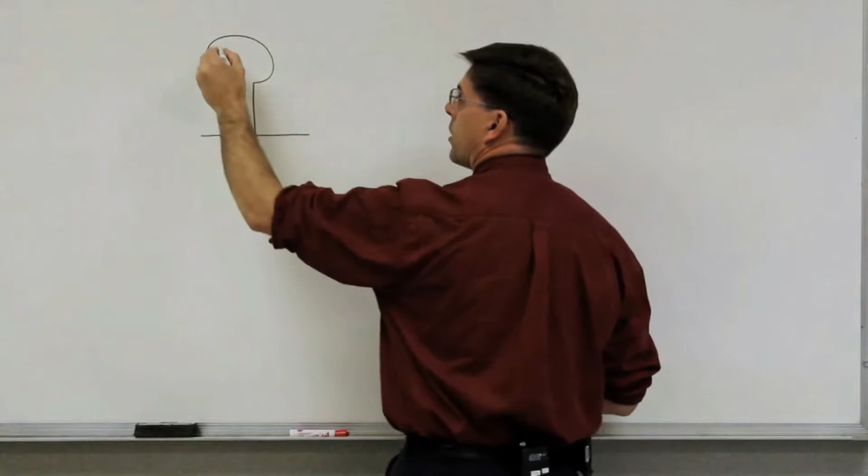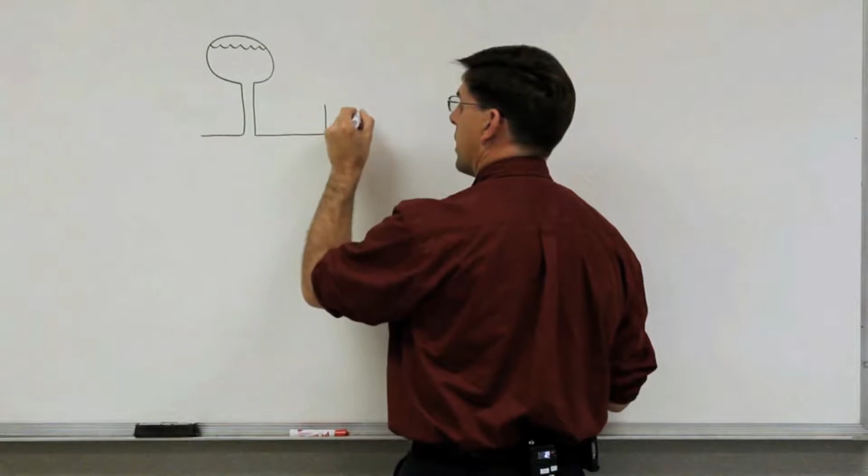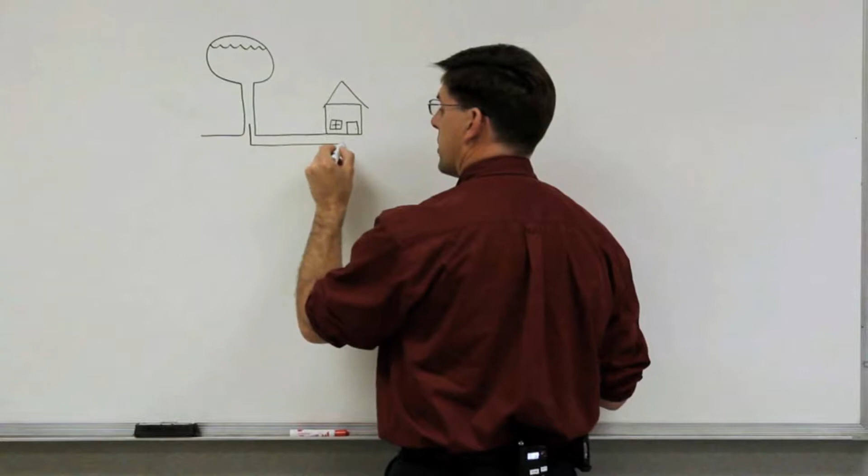First, we're going to try to equate the theory of the charging system to an actual water distribution system in a small town or village. Right here we've got a water tower, and our water tower is full of water. The job of the water tower is to store water for use on demand. Now we also need to be able to use that water, so I'm going to build a little house right here, with a cute little window and a little door. I'm going to put a standpipe in my water tower up to my house.

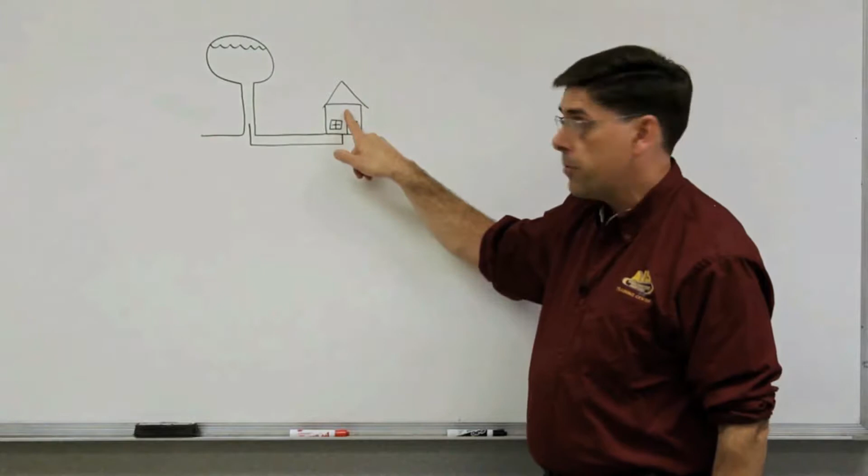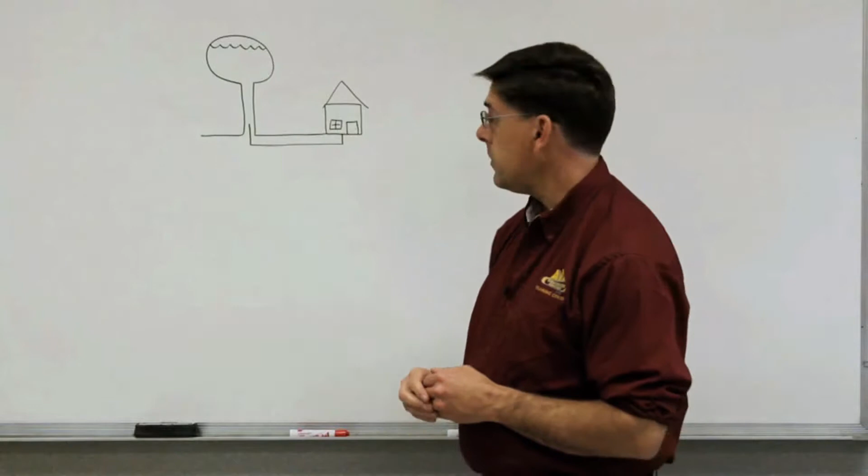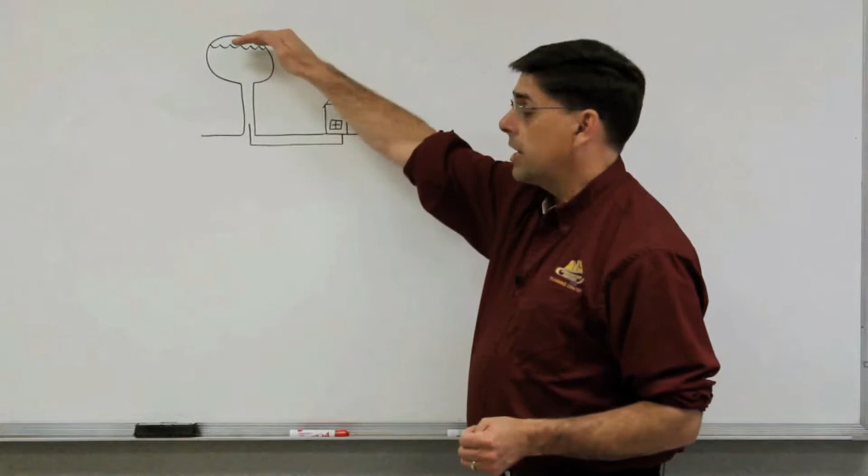Here's my storage, here's my water being stored, and here's my load, or my demand, if you will. So the water tower is supplying water to my house, or my network of stores and schools and factories. This all works fine and dandy, because when we turn on our water system, we turn on the sprinkler, the dishwasher, flush a toilet, take a shower - what's going to happen to our water tower level is it's going to go down.

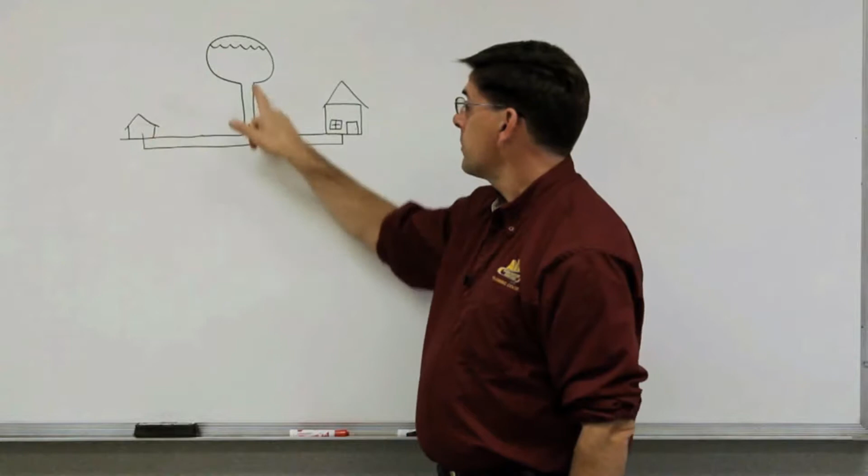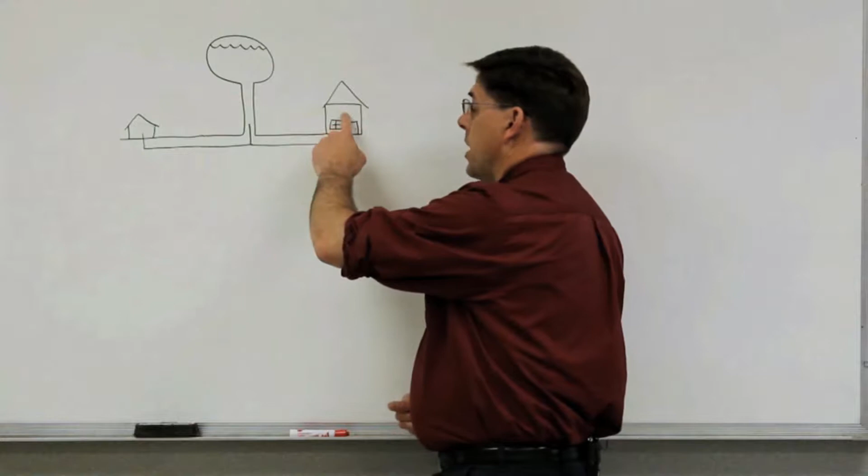That all works fine and dandy until the water tower is empty, and we need to pump it back up. So here we have a pump house keeping our water tower full. Here's our water tower, which is our storage, and here's our demand, where the water is going to. As the water gets used in the town, the water level goes down. The pump house turns on and keeps the water tower full. Remember, this is like an old water tower system here.

Now let's talk a little bit about sizing the components with each other, or the system together - it all has to work together as a system. So I have a pump house here. The pump house really has to be sized to the water tank and the system. The water tower has to be sized to the community. You can just imagine if I had a real big community and a little tiny water tower, I wouldn't have enough reserve for when my pump is not running.

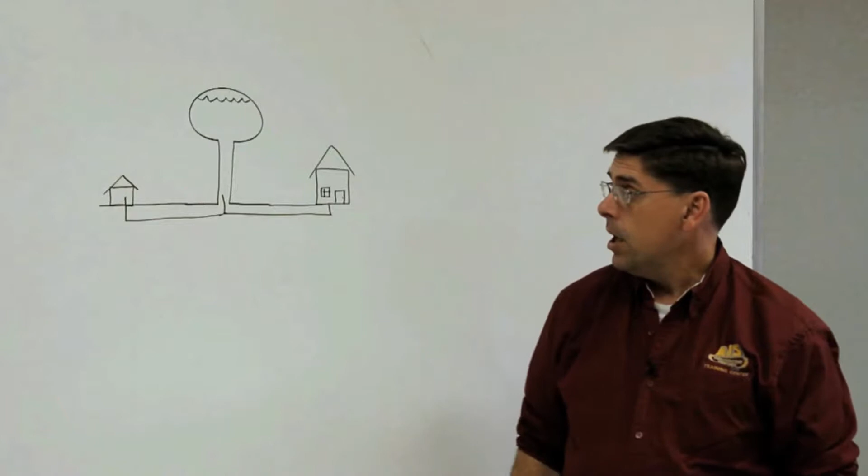I realize in a pump community they're running basically all the time, but in our case, when we equate to the charging system, it is not always running. If we have too small of a water tower, it can't supply the community, and it may overwork the pump house. There's no use putting too big of a water tower in, because you don't have that much real estate and it costs more money. So it really has to be sized according to what the loads are, what the demand is.

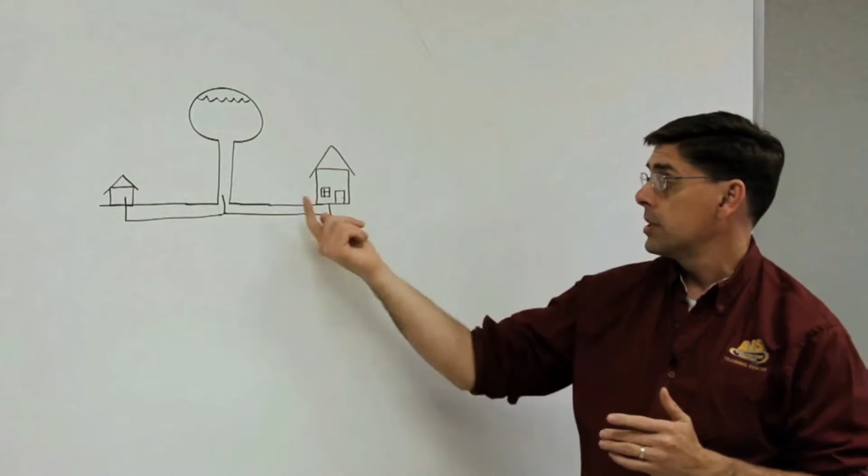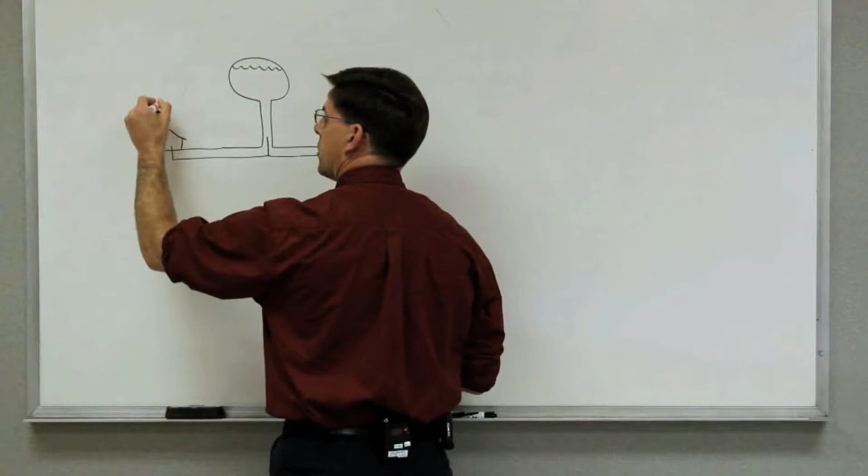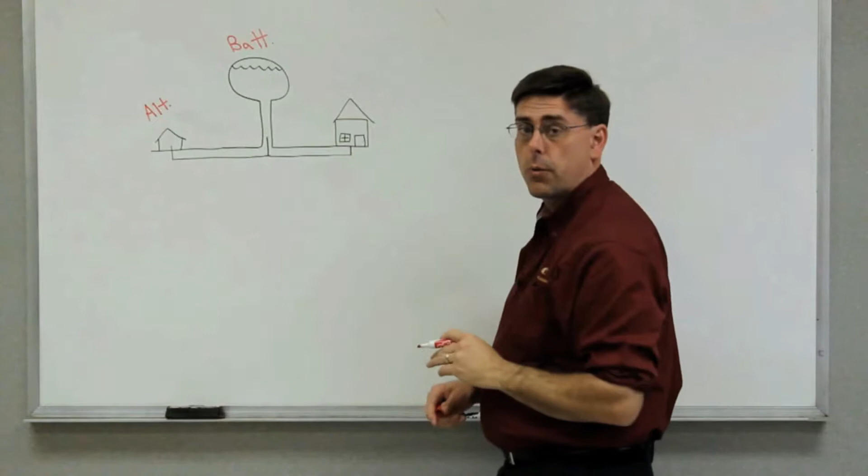Okay, now let's name our electrical components. We know that's not a pump house, because there's no pump house in our electrical system - that is our alternator. This water tower, our storage system, is our battery. We do know from a previous video that a battery does more than just store, it does produce it too, but for our charging system we're not worried about that. We're going to look at this today as just a storage facility.

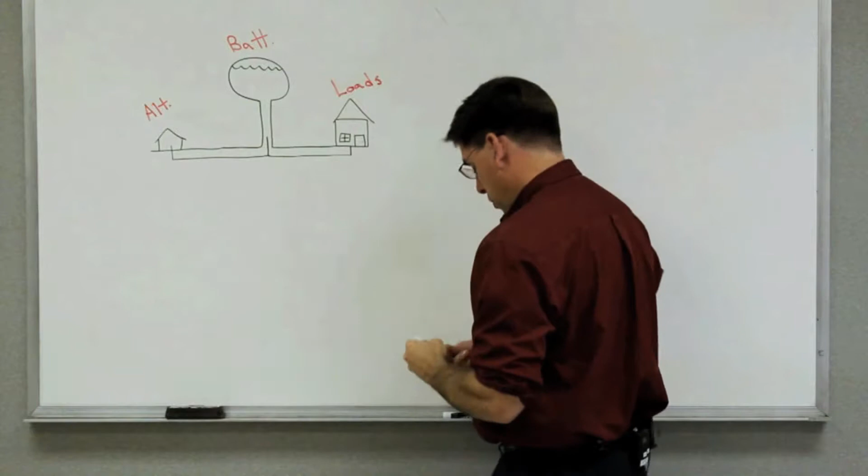And then we cannot talk about this as our water system or our electrical system, because the whole thing is part of the system - this is just one part of the system. So we're going to talk about this as the loads, being there's more than one load. The shower is one load, and we're not worried about just one shower - we're worried about the toilet, the dishwasher, the water faucets, everything combined as part of our loads on our electrical system.

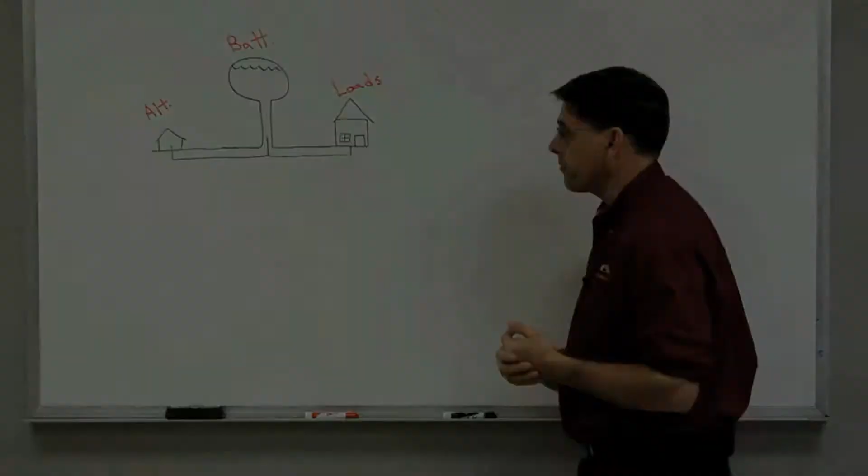Okay, now let's talk about sizing the components a little bit. Now, it's not like you're going to just take a piece of equipment and design it and decide what size alternator or what size battery to put on it. But it's when you start adding components to it, or you start having failures, like you're going through alternators, that you need to understand what's really going on with it, and why it has a certain battery, and why it has a certain alternator.

So, for the heck of it, for the sake of argument, I'm going to call this a 90 amp alternator - that is rated at 90 amps.

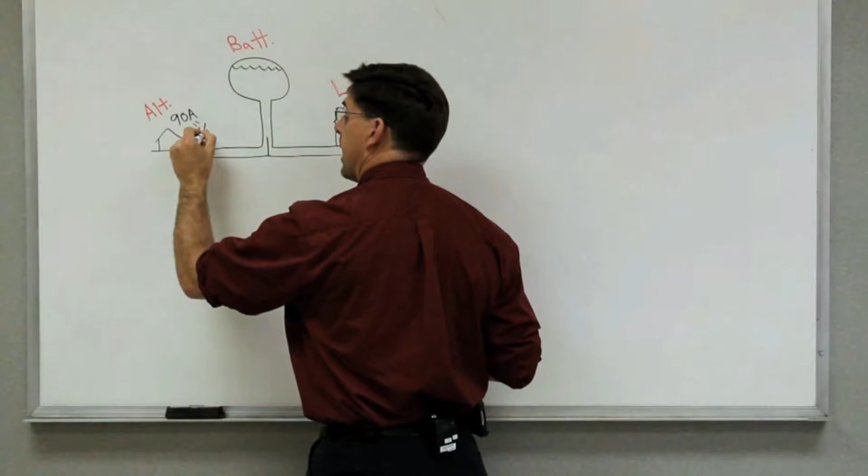It will produce 90 amps, but not for a sustained length of time. It will peak and run at 90 amps for a while, but not sustained. It is rated at 90 amps, and if you take half of that amperage rating, which equals 45 amps, that 90 amp alternator is designed to sustain a 45 amp load over a long period of time. It will produce 50, 60, 70, 80 amps, but the longer it produces more amperage, the shorter the life of that alternator is expected to be.

Now the battery, the water tower. We need to have a big enough battery to take on the amount of load when this is not running, for one thing.

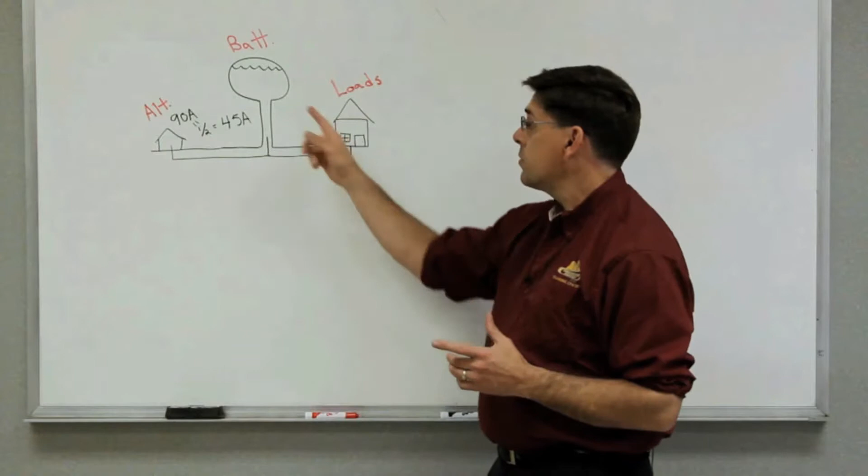For example, let's go back to our water tower. If we put too small of a water tower in our community, when the pump isn't running, we run out of water too quickly. Same with our battery. We may not have enough battery to even start the vehicle or run the lights for X amount of hours without the engine running. There's no use putting too big of a water tower on either. Space in a mobile vehicle is very critical, so we're not going to put any bigger battery than what we really need. That's why our battery is sized physically the way it is.

There's more that goes into sizing a battery as far as reserve capacity and cold cranking amps. That's another video.

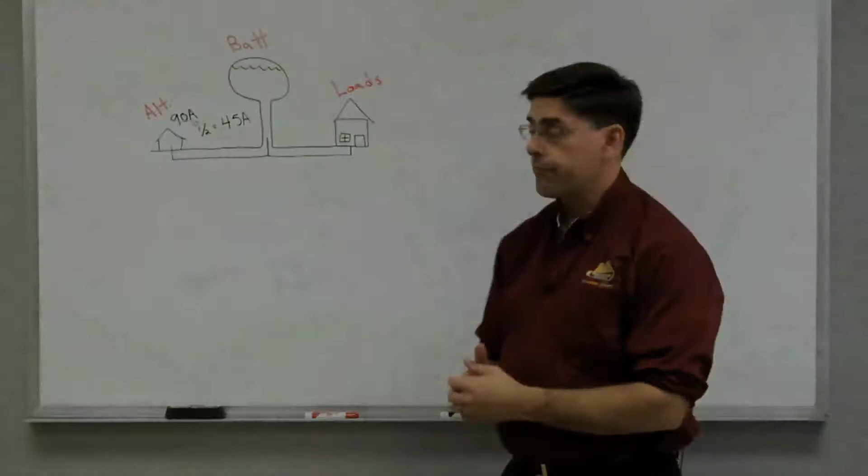Okay, let's look at doing some basic checks to the charging system using just a voltmeter.

First, we're going to take a voltmeter reading with the machine shut off. I want to know the level of charge in the battery with it just sitting there. It's not unusual to see a 12 volt battery read 13, 13.2. It might be 12.8. If it was as low as 12 or 12.4, it might be a little on the low side, but it's not unusual to see about 13. So let's just say we have about 13 volts in our battery sitting there static, not running.

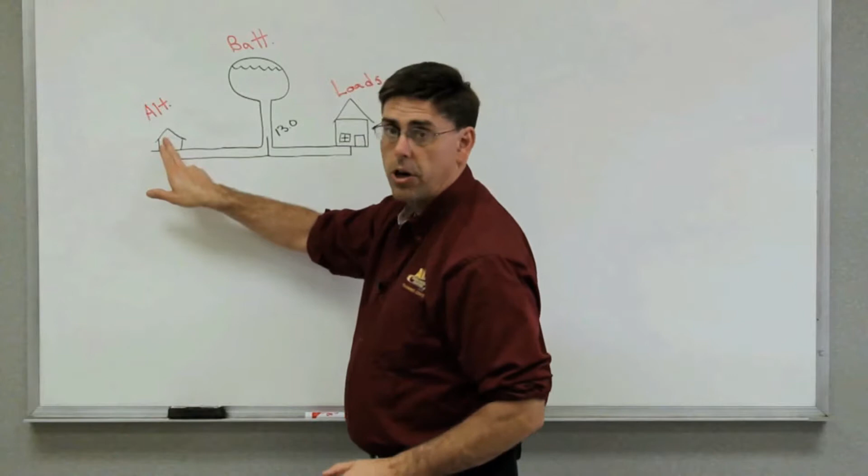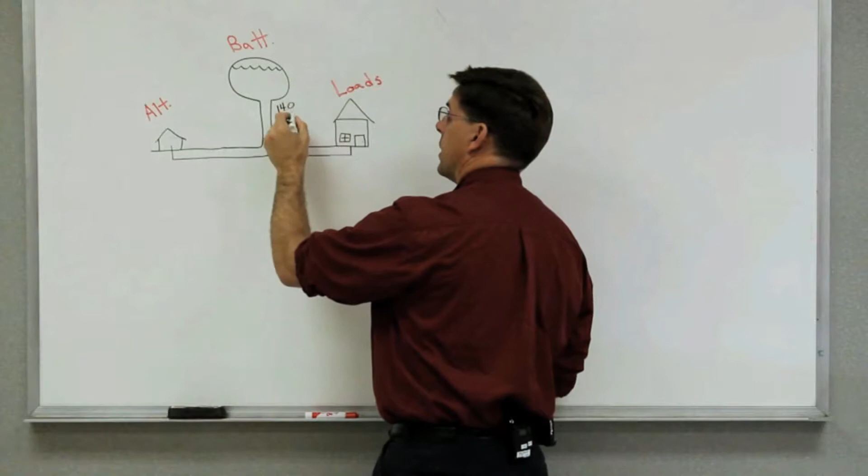We start the engine up, so we start our pump house, our electron pump, and we're going to start to charge the battery. Give it a minute or two to stabilize, and you should see within a few seconds anywhere from 14 to 14.5 volts on your voltmeter when it's running. That is not unusual to see. That is entirely normal. If you see upwards around 15, 14.7, maybe 15, you might be experiencing an overcharging situation, and we need to have that looked at.

Now remember, we're sitting here running at idle. The key thing is we saw more voltage running than not running. That's the important part. Rev the engine up, whether it's governed or just run it up a couple thousand RPM. We want to make sure that voltage doesn't get out of hand, like around 15, 14.8, 14.9, because then you may be looking at overcharging and start boiling batteries out. Okay, so now we've got our check: we did it static, we did it at idle, and we did it at high idle or mid-range engine speed.

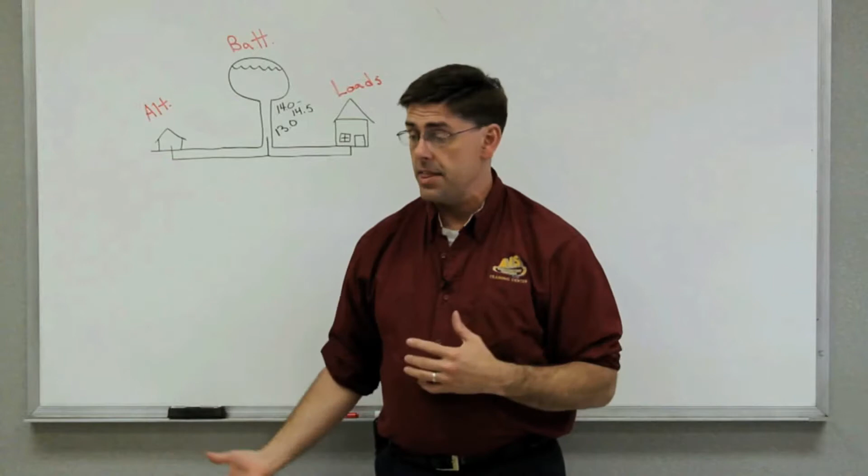Now let's start putting some loads on the system. We're going to turn on the wipers, the air conditioning, the four-way flashers, any kind of lights we have. If you want to beep the horn, you can do that too. The more electrical loads you put on, the better. So in our water system analogy, we're going to turn on all the faucets in town, or in this case in our house. We're going to turn everything on, and we want to make sure our pumping system can keep up with that. Look at your voltage. If you drop a few tenths, I'm okay with that.

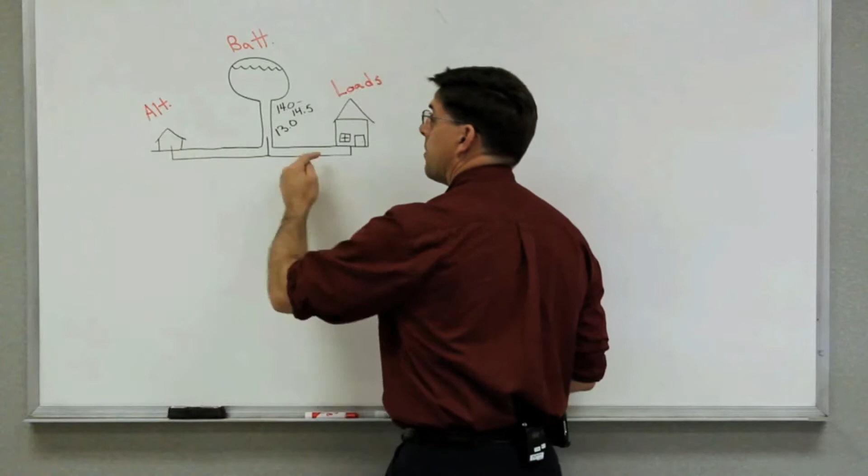But the big thing is you need to stay above the static voltage. If you start dropping down below 12 or 13 in this case, you load everything up and you drop to 12.7, what that tells me is this alternator is not keeping up, and you're starting to dump out of your water system. You're starting to deplete your whole water supply because you don't have enough pump going on here.

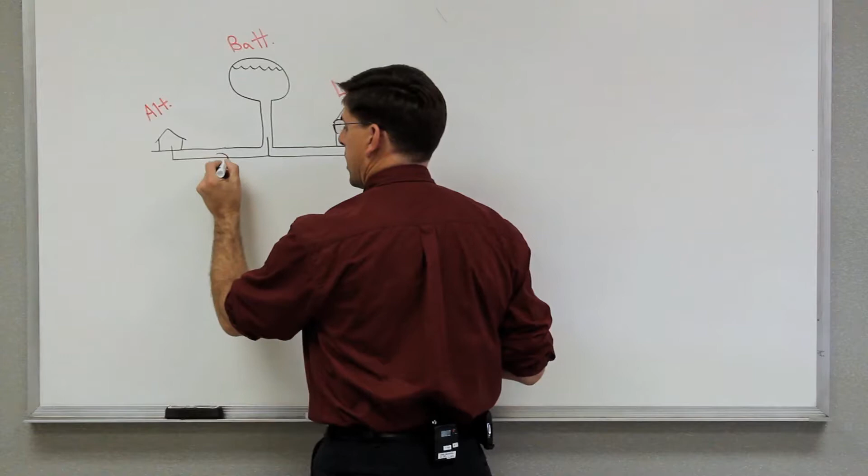Okay, now the true way of checking a charging system is to use an amp clamp or some method of measuring amperage or the flow. Just like when you're checking a pump out, the really true way of checking that pump is to see how many gallons per minute, how much flow is coming out of it. So we are going to attach an amp clamp right here on our wire. We'll talk about what the amp clamp is here shortly when we get out there in the shop, and we're going to be measuring the amount of flow coming out of our alternator.

Okay, we've got our amp clamp on, and we're going to start the machine up, start the engine up. Don't be surprised if that goes fairly high, maybe even a little higher than half of the rated amperage of the alternator for just a few seconds, because that's just recouping what you've used when you went through the cranking process. Give it a few seconds, and maybe even a few minutes, to stabilize, and you're looking at what it's charging or what its output is.

After things stabilize, there's a lot of variables going on, but I would expect somewhere between 5, 10, maybe 15 amps of charge be there at all times, even if you say there's nothing going on. Well, there are things on that you can't control.

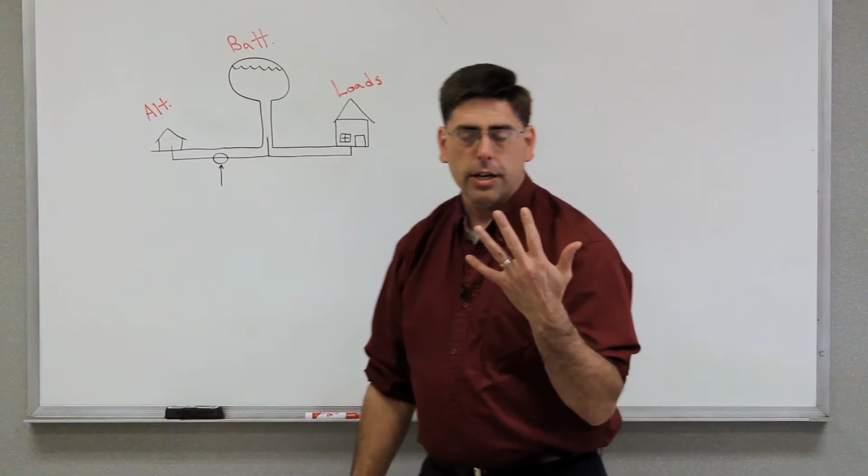Now, start turning loads on your vehicle: lights, radio, wipers, any electrical component, and you're looking at what the amperage is coming out of the alternator. You may run this up, it may run to half, it may exceed that, then that's okay, as long as, say, if you're at 5 items and you exceed it, go back and look at what you're running. If the operator's never going to run only but 3 things and you stay below that half, you're probably good to go. But if it's like the plow truck, plow lights, wipers, heater, strobes, any kind of controllers they're running there too, if that starts exceeding and pushing that rating of the alternator, that's where you start getting into trouble and start shortening the life of your alternator.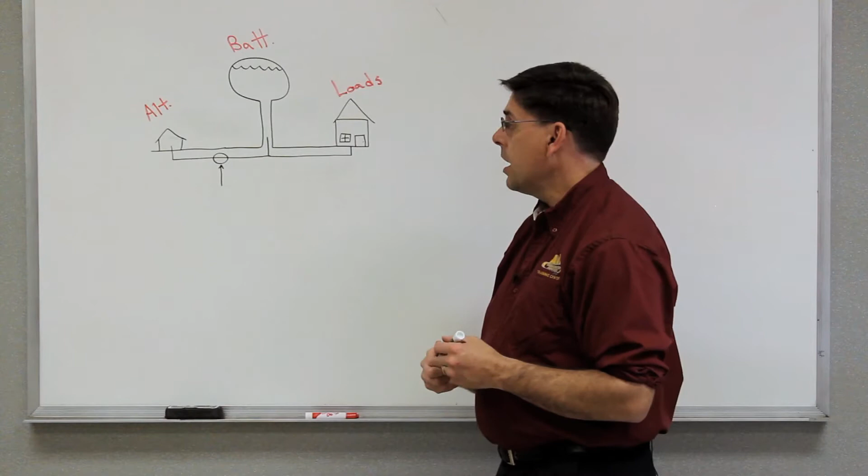Now the true method of establishing what your demand is on your system: shut the machine off, turn on everything that you possibly can, everything electrical, use your amp clamp and put it on the output of the battery cable. It does not matter which cable you put it on, the positive or the negative. You put it on and check what your flow is out of your battery, powering up everything.

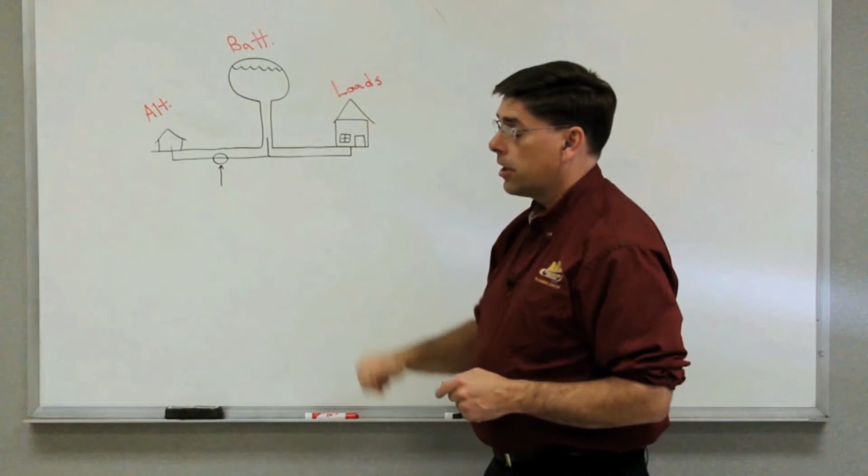Suppose we want to know what our alternator is capable of putting out, the maximum it's capable of putting out. It doesn't matter if it's rated 90 amp or 120 or 80 — it might only be capable of 60, something like this. So what we're going to do, we'll do this out in the shop too: we're essentially going to take our water system and open up the fire hydrants, every faucet in town, and put such a high load on the system that it's going to put that out to maximum.

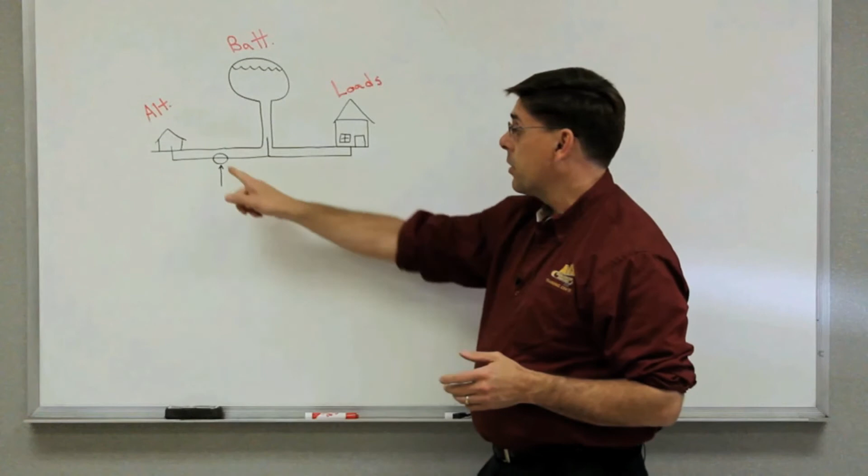And how are we going to do that? We're going to take a load tester, a battery load tester that has to be capable of drawing more current than what the alternator is putting out. We're going to crank that down and see what its maximum output is out of the alternator, whether it be 40 or 20 or 200 or whatever that may be.

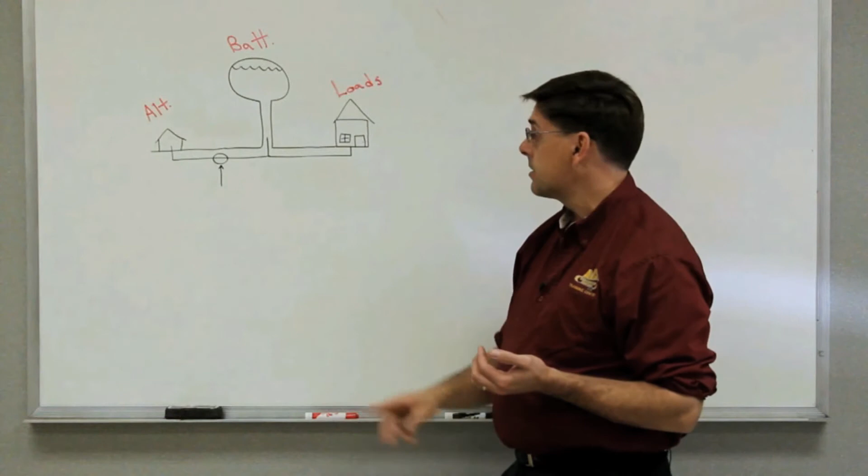So, to recap here on our tests: we're going to put a voltmeter on it. We're going to check our static voltage, shut off. We're going to check our charging voltage at an idle. We're going to check it at high idle, make sure we're not overcharging. We're going to load the system down. That'll give a pretty good idea of what our system is capable of based only on voltage.

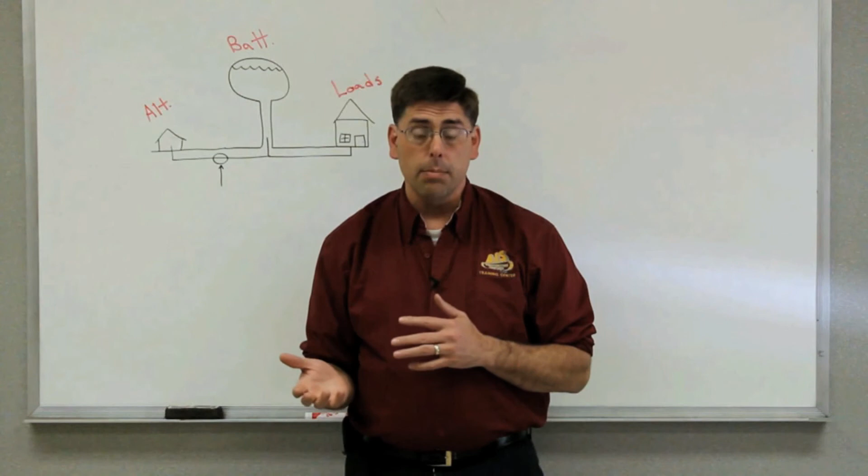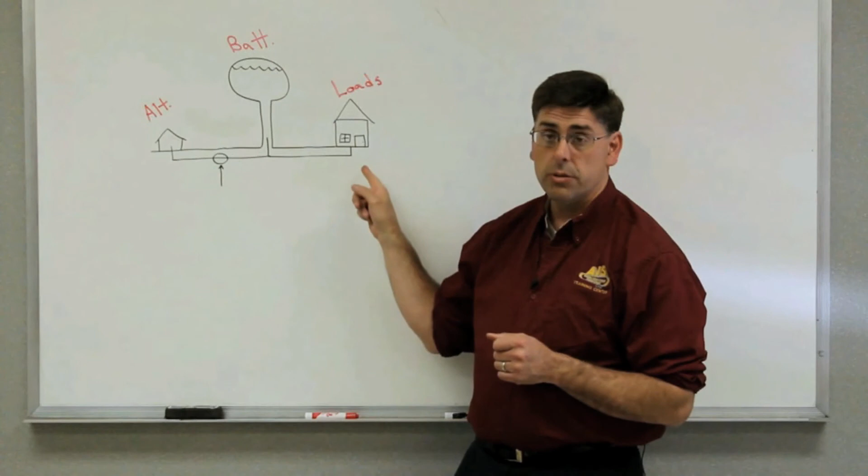Then we're going to take the amp clamp and put it on the alternator discharge, the charging wire of the alternator, and see what the alternator is charging. We're going to load it up and make sure that we're not overloading the alternator. Then we're going to put the load tester on the battery and load our system right up and see what the maximum is out of our alternator.